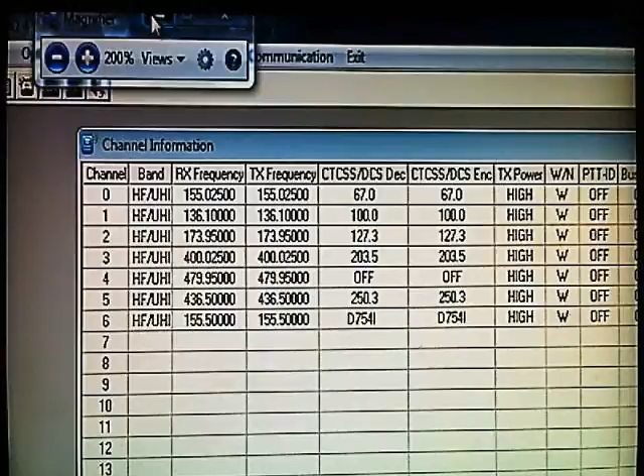Okay, so now what I'm going to do is take - and now, if it doesn't beep like you just heard, you got to come over here. Hang on, let me magnify this. Okay, you have to - hang on, minimize that. You have to come over here to communication. Click on it. This window here will pop up with all the COM ports.

It puts the USB adapter as a COM port. Right now it auto-detects the adapter, so it already detected mine as being on COM port 5. Excuse me, I have to take a drink because talking hurts sometimes. Okay, it's COM port 5.

If there is an error, it will give you an error message. Like, I'll put it as COM 3 for now - I know it's COM 5. If you try and click confirm, it'll say this: communication port open error. So you click OK. I'll put it as COM 5 because I know it's there.

Now, if you ever open this program and you come up with that error - you hear that? That's my radio restarting again. What I'm going to do is minimize this.

Now, one thing I notice about this program, it does not move. When you go over here, go like that, you can minimize it like this. You can grab here, it will not move at all. Ready? Watch, I'll minimize - where did it go? I'll minimize this. Now see how you can... now it won't move at all. You can adjust it, shrink it down, and everything like that. But once you do that, see, you can grab the top of it - it won't move at all. If you come over here, it doesn't give you the option of moving it.

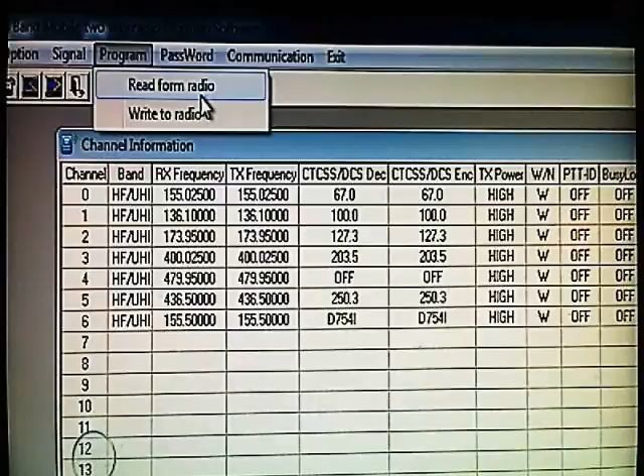Yeah, the loss in translation is quite funny.

So you click on this, and I'll minimize this. Now see this? This is what it says. Read data from radio. You click on read, connecting, it'll do this. If you do the program and then read from radio and do this, it'll read everything in the radio.

The settings and all that are different things that you can program, but you have to program them individually. See, complete, and the radio just reset itself again. That's a common occurrence. So you click OK, then you click X.

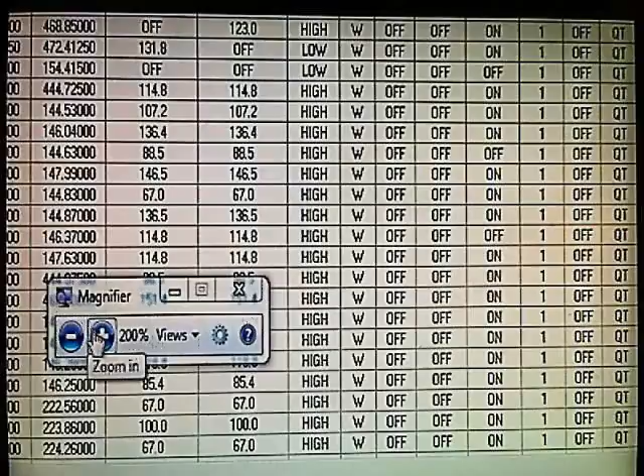And now if you look, these are all the frequencies on the radio that I put in. Okay, I put all these in by hand. Believe me, it uses the same style as, what is that, Microsoft Excel, but it's far more dumb than Microsoft Excel. So I mean, you can't, if you do all these, it won't.

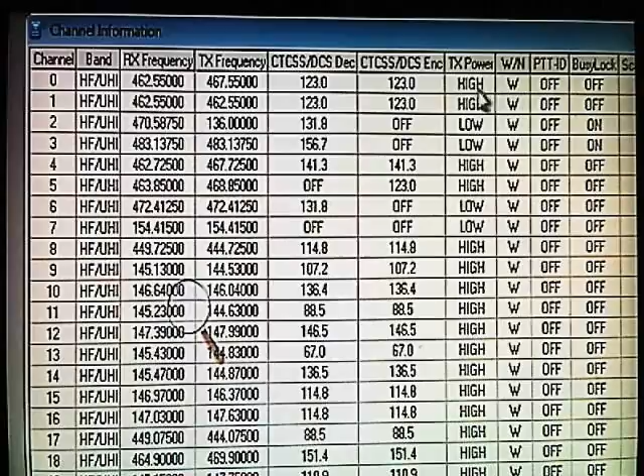This is basically the CTCSS. If it hears the correct tone, it will unmute the speaker. SCR - oh, what is SCR? I forgot. But it's, and then the channel name. There's nothing else after this.

You have a limit of 6 letters, but it let me put 8. So be very wary of what you do. And then...

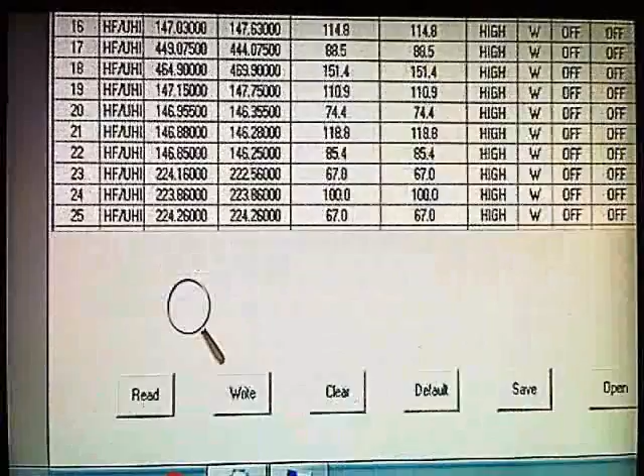You come over here. This is open a file, open settings and things like that. Save. This is channel information. Well, no, this is the optional features. Sorry, this is channel information.

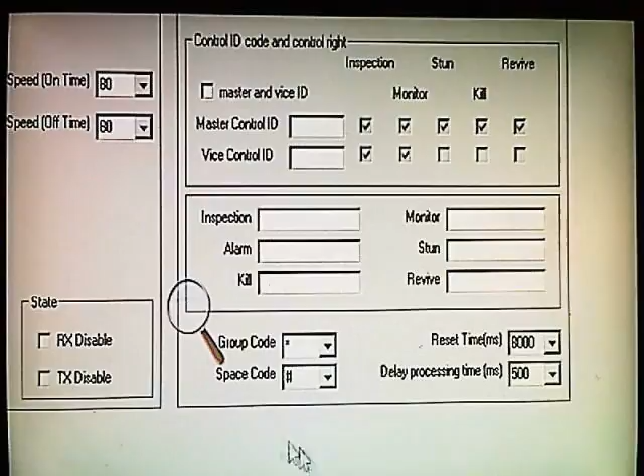This is DTMF. This is that, what do you call it? If you want to stun the radio, you can by doing specific things to it. DTMF kill, things like that. And then this is the channel info.

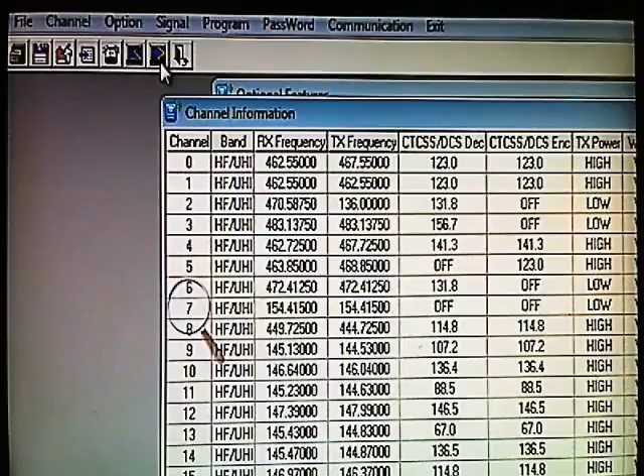Okay, so this is set it: optional features, channel information, DTMF kill, basically. Then this is - they don't have any pop-ups for this in the English version. They have them in the Chinese version, but they don't come up with it. I got this one - I actually had to download this program because it's a lot more stable.

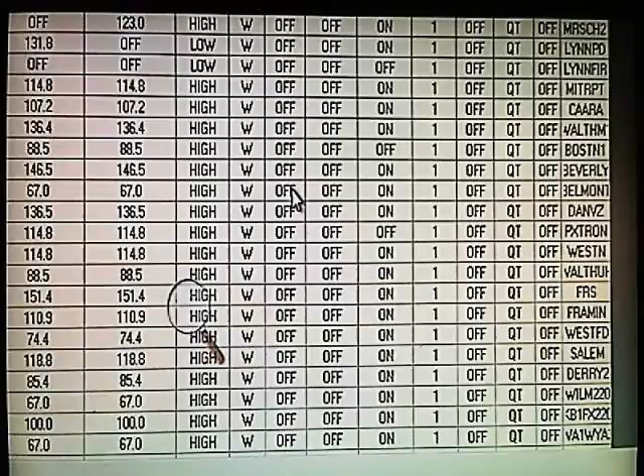So these are all - and the scroll mouse does not work on this. It will not scroll. So you're pretty much SOL. You have to manually put it down like this.

So what I'm going to do is I'm going to close this. Now these are the optional settings. TMR, you can set it. This is the what is it, the scan function.

Well, actually, no, it's not scan function. It's what can receive. Like, you can have it as main and A, main and B, main and C, main and D. Basically, the 4 layers of the radio. Or you can have it all the way down till you get all of them. I have it off because they don't really receive all that well.

Squelch level 1, timeout timer in seconds, 180, which is roughly 3 minutes. APO, automatic power off. Let's see.

ABR, I don't even know. DTM, yeah. BCL, scan add, scan, reverse, push to talk delay, alarm type, channel.

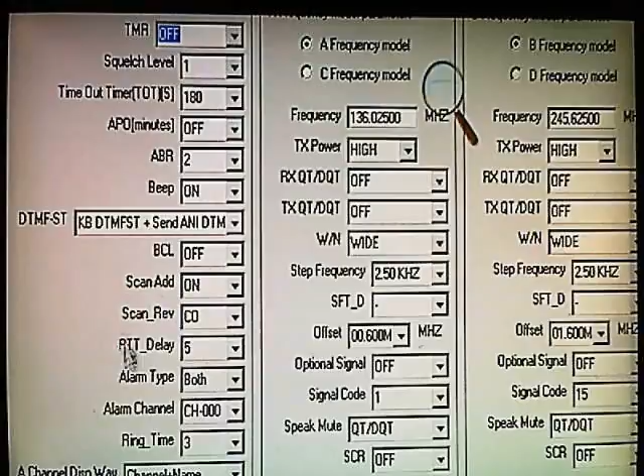Basically the DTMF is if you key up with DTMF on another radio, you can basically call them. If you hit the right tones, like 1, 2, 3, 4, you can call a specific radio through a repeater, and it'll set off an alarm on their radio to let them know you're calling.

And you can also, like my little thing here, yeah, you cannot move this over at all. See, there's no option to move it. Even with it at 1280 by 800, this is tough to look at. These are all the colors of the screen you can put, and all the different settings for the screen, colors, and things like that.

Relay signal. I don't think it does a relay condition. This has me wondering. It may actually. I don't know, I'm still learning this software, and it's tough to learn.

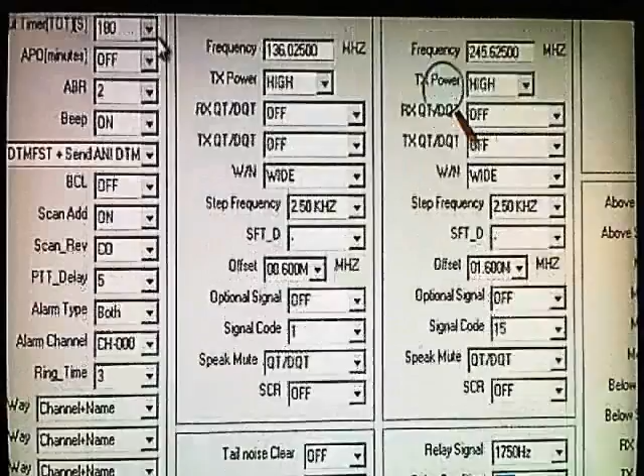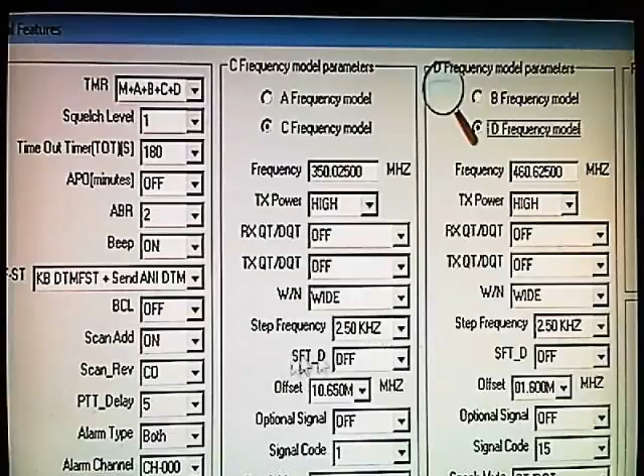This doesn't work, I don't know why. Let's see. You can put a password on the radio so no one can access or change the files without it.

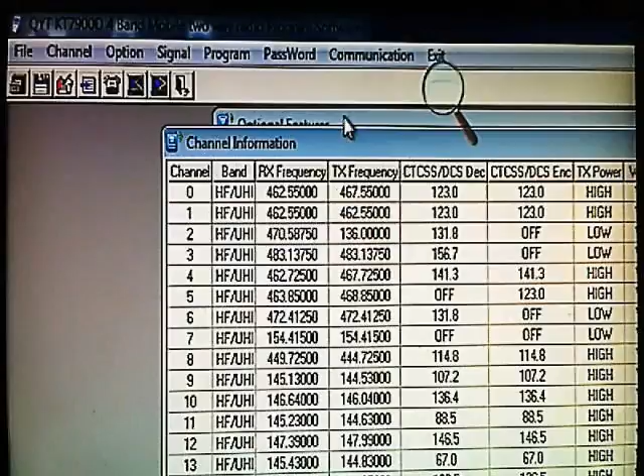And this is the channel information. Actually, that's optional features, I believe. Let me close this, I want to see. See, option, yep, that opens. Basically, all these right here are up here. So you just go like that. I'll close this again, so I'm gonna open up a new one.

Oh, it doesn't work. Hang on, let me clear that. Don't worry, I have it saved on my radio and everything. But to add frequencies and stuff like that, you gotta basically do it like this: band, VHF, UHF, RX frequency. I'll just put in the frequencies that were there.

Now you have to put the decimal point in, because if you don't, you'll go like this. If you hit tab, hang on. If you don't put the decimal in and you hit tab or enter, well, it's not working. But you go over here and you see this, over the range of received frequency. So then it just does this. You got to go like this.

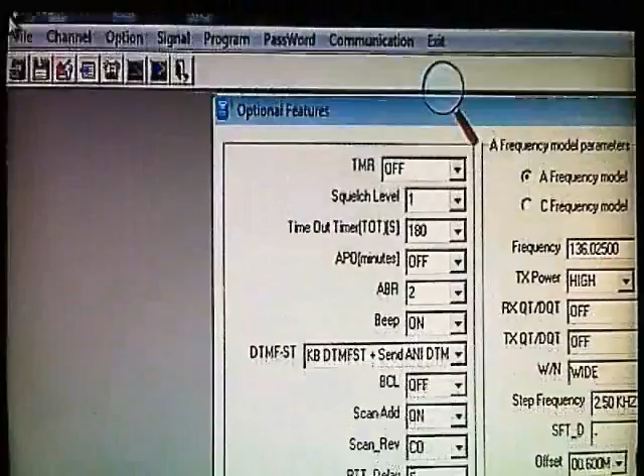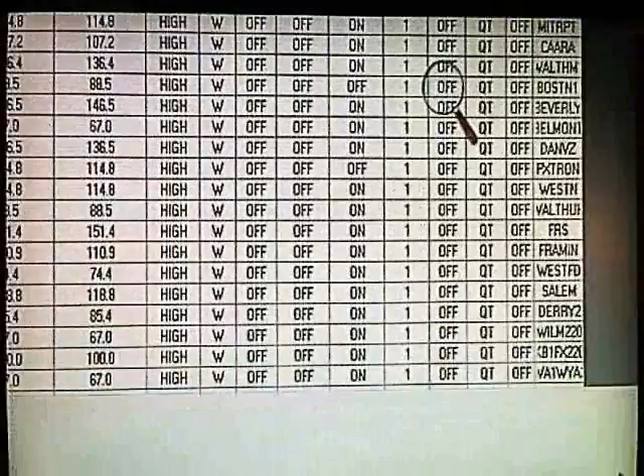So now, what I'm going to do, if you happen to do this, always, always, always back up your stuff, okay? This is all my frequencies. See right there? Now I'm going to write it to the radio because I screwed up bad.

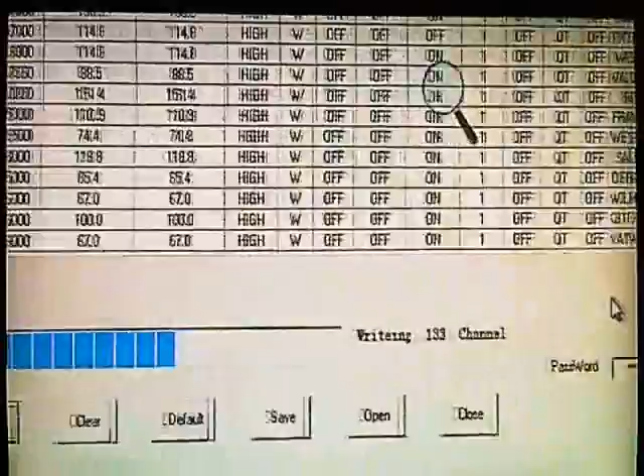Now it's writing, it's going to reset again, and it's going to put everything back. Hopefully it won't brick the radio. So there we go, boom. Complete, writing the data to transceiver.

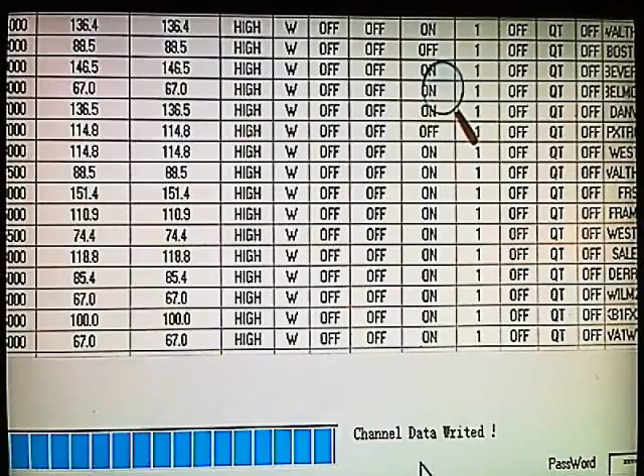Now, if you look right here, I love the loss of English. Okay, now I'm going to close this. Let's see, hang on, X out of that.

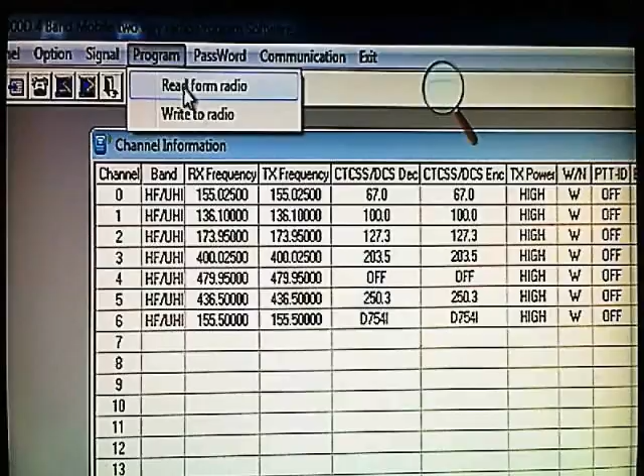File, new. Let's see if it'll program. Actually, I'm going to exit, and then redo it. See? 1280 by 800, my display is nowhere near 1280 by 800. Okay, now, program, read from radio, and you heard the radio beep again, so it's going to read. I want to see how it does.

You can change the startup screen, so instead of it saying welcome, you can put anything you want, which you guys saw what I have for mine. I love setting this up.

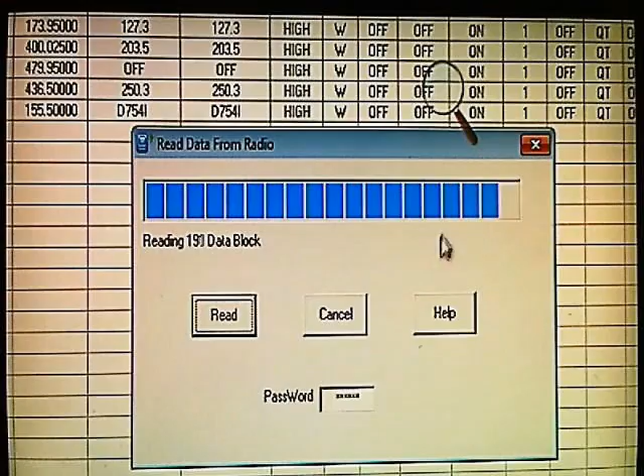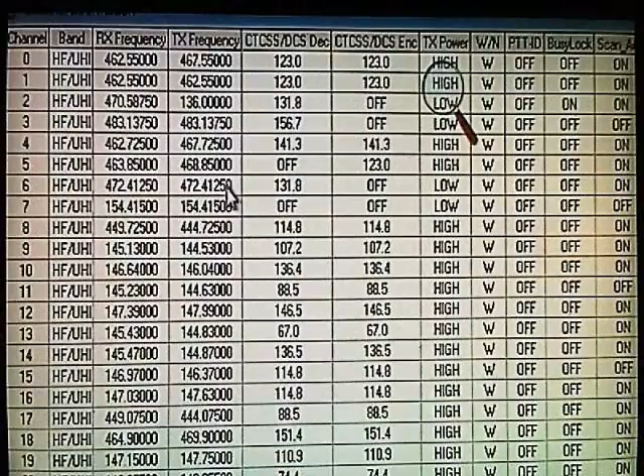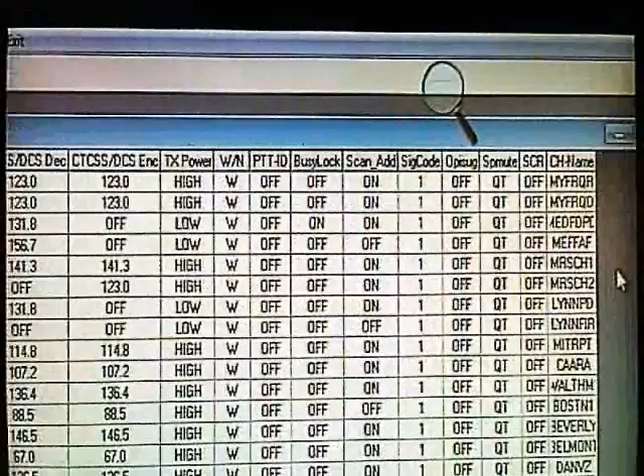Let's go like that, close that, boom, everything's back in place. Okay, alright, everything's back in place, which is good. So, hang on, 725, what's that? MRS CH1, okay. Yeah, so everything's back in place.

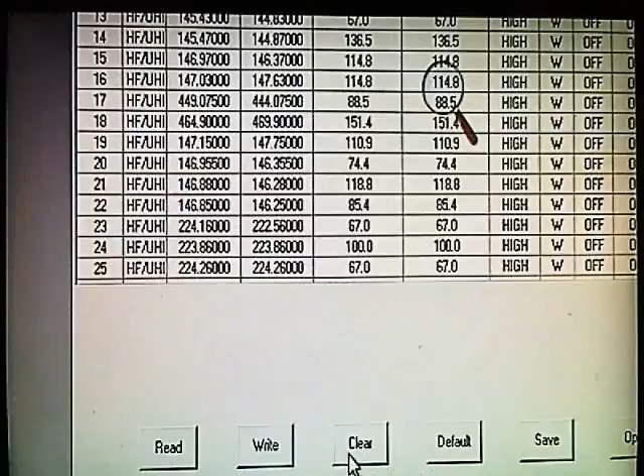Like I said, when you do that, I'll close this, go channel, file, new. That didn't work, again. So I'm going to clear this.

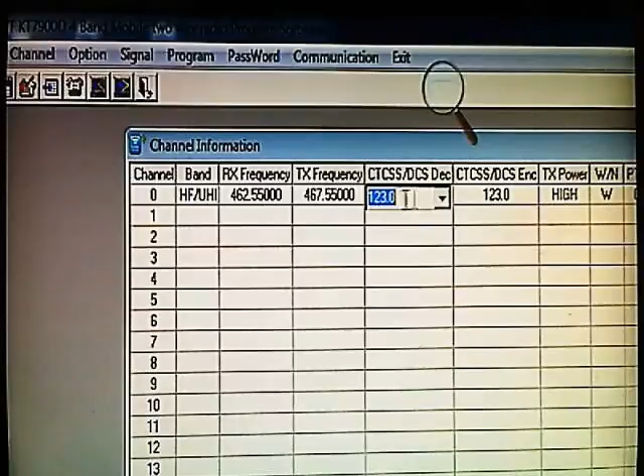Now, like I was saying, you go here, VHF, UHF, you come over here, and then you gotta come over here, backspace, put the input. This, you gotta do the tone. Come down, this is where the scroll mouse works. Now see, it automatically did the encode. When you did the decode, it does the encode all automatic.

Wide, narrow, push to talk ID. You leave PTT ID off because then it starts beeping, either after you're on or off. When you key up or unkey, it'll stop beeping. Busy lock, that's if, let's say, it's a busy repeater, or there's another frequency, like another tone active. It won't let you transmit on that. Scan add, it'll add it to the scanner, which doesn't really work all that well. Signal code 1, that's the kill button, thing like that.

OPISUG, I don't know what that is. Oh. I don't know. Speaker mute, of course. QT or, it basically QT and or. It's kind of a logic thing.

It'll go by tone, by the DTMF. Basically, it'll go by tone, tone and DTMF, or tone or DTMF. So basically, if you just do DTMF, it'll do it. If you do tone, it'll do it. So I usually keep it at QT.

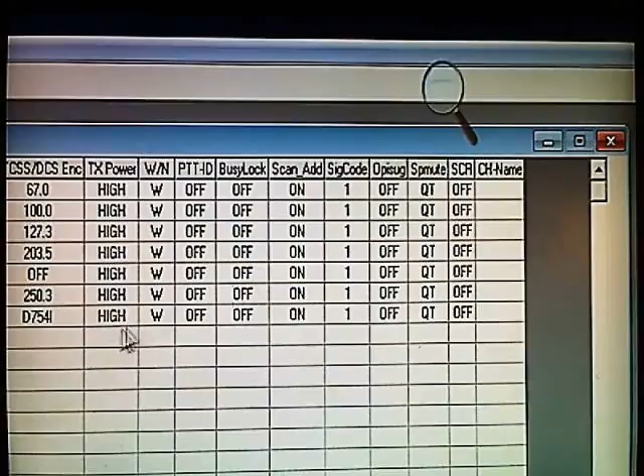So other than that, now see, like I said, it causes. I mean, you can tap on this and go across. I don't know why it did that. But it's easy. It's weird to program because you can't really get the thing to work right for you.

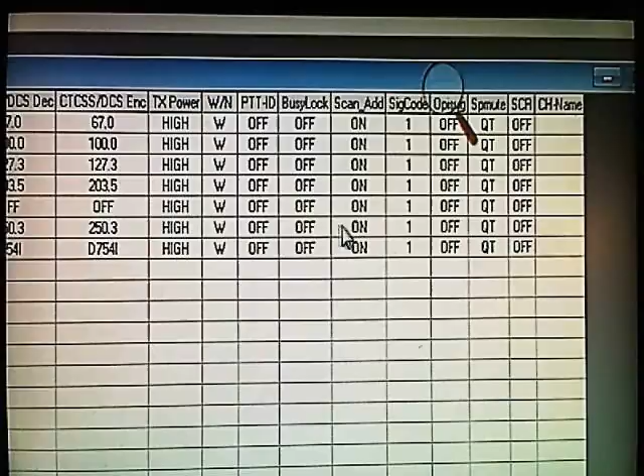So you have to make do with what it is. There's a lot of miscommunications, error in the programming and everything. So you got to make sure you do it right, because one wrong thing.

And then okay, now I'm gonna go to the options again. What is that? Oh yeah, that's that. Like I said, that's that. Now see, squelch level 5. That's because I didn't read from my radio. Thankfully, I don't want to brick it again.

So now I'll go like this, read from radio, and watch this. This is all going to change. APO, automatic power off.

The ABR dims the display. It does not work, no matter what you do. I've tried getting it to work — it does not work. See? Boom, boom, boom. ABR, 2 minutes. I was sitting there watching it for 10 minutes, and it did not come on, or it did not shut off.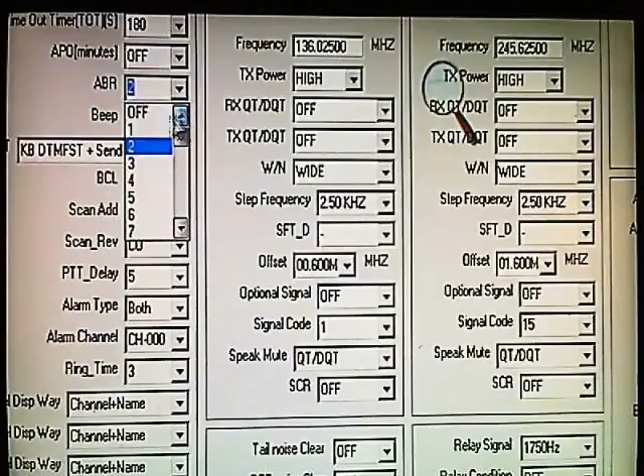And the radio was not busy — I had the radio disconnected from the antenna. So the display off function does not work. Don't even bother with it. Just leave it off, and it'll work fine.

You can set an alarm and all that fun stuff. There's also the stat-free display, down at the bottom of the screen. Normally stock from the factory it says KT-7900D, but you can put your call sign or anything you want.

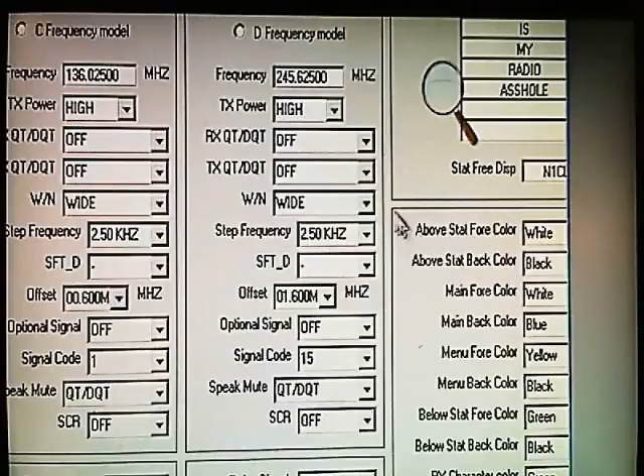The power-on message, when you power the radio on, you can put anything you want. As you can see, what I put on mine is a very funny thing. I put it on all 3 of my radios because, well, I can — I'm the only one who uses them anyway, so it doesn't really matter.

Now I don't know why that says M and C — I didn't set it that way. What it does is go main, which is basically A. I don't know what they designate as M, but each of these, A, B, C, D, are the 4 displays on the channel. You'll see channel A, channel B, channel C, channel D, and that's how it works.

But I don't know why I put it at that. I tried to have it on all 4 like that, but it didn't work the way I wanted — it wouldn't really work. Let's see, frequency — I don't know why I put it to C. It goes between memories and stuff.

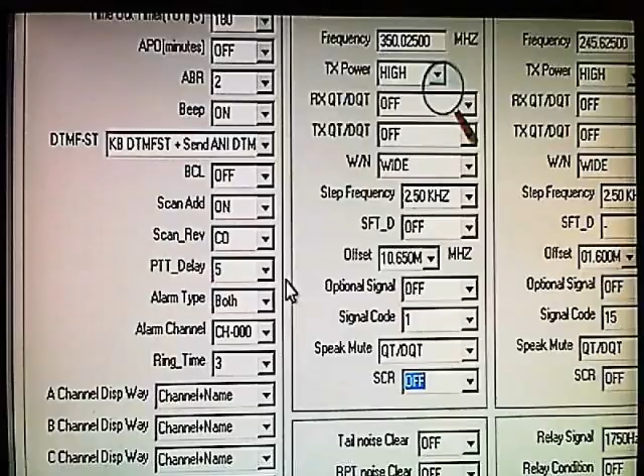Hopefully this will be a little more helpful. I know I was rambling and blabbering and it doesn't really give much information, but you guys get a bit of an understanding as to the full extent of the programming and how much of a pain in the neck it can be. Other than that, the program does pretty good.

It programs the radio, no problem. It reads from the radio, no problem. It's just programming the frequencies in — programming them by the radio itself, you cannot put the names in at all, like this here. Like all these channels. Hang on, let me read.

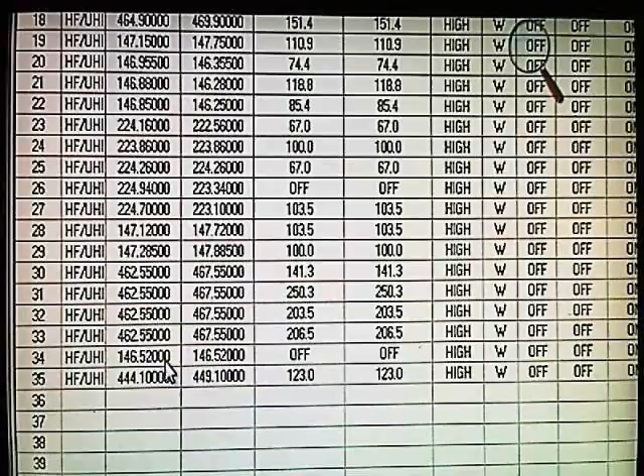Because, like I said, I did 35 frequencies. And it was really, really tough to do because it's a pain in the neck getting these things in. You have to do each and every single thing by hand, one at a time. With it being like this, if a repeater has an output tone that's different from the input, you can do that here.

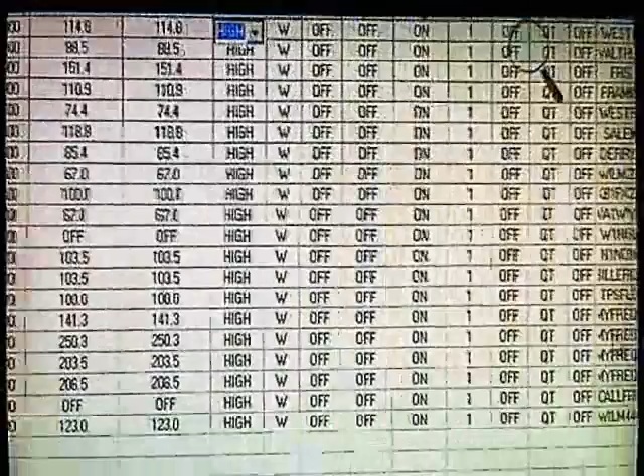You can put it on low power, or set it like this, high or low, usually on frequencies that have, like, public safety, things like that. As I said, I did 35 of these.

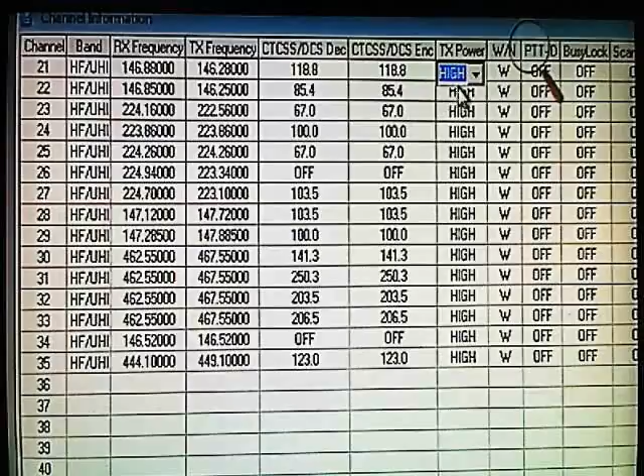Oh, look at that — that was an error I didn't even see. I put in 35 frequencies; it took me about an hour and a half to do. So, like all these police frequencies, if you look, I put it on low power. I put the receive frequency there, the transmit frequency there, so there's no chance of an accident. In fact, I should change that — that should not be there.

Normally I put frequencies that are out of the range of the transmit, so it won't transmit anywhere near the intended frequency. That way I don't have to worry about people getting mad at me for it.